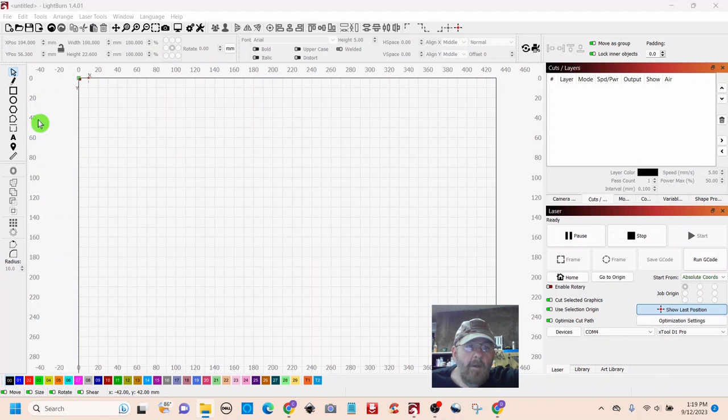Okay, so we're going to start by just grabbing a box and we're going to drag out a rectangle. Let's just make it 100 millimeters by 20.

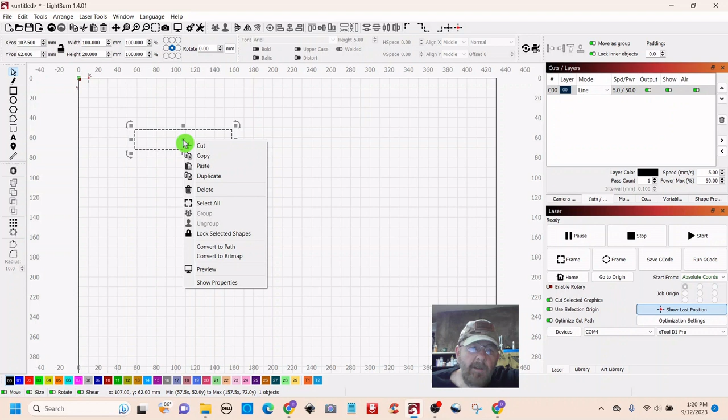Click your arrow and it'll select, and then right click and duplicate. And we're just going to make 2 without the adjustment to start with.

Okay, so go over and grab another box, drag out another little box. We're going to make this 10 by 3, and that accounts for the full width of the wood.

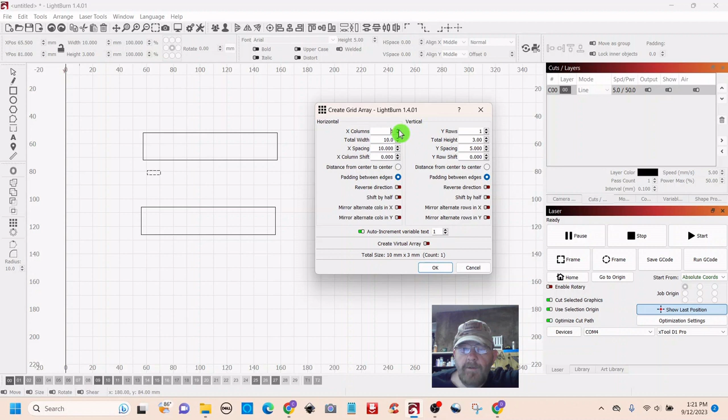Okay, click your arrow to select. Now we're going to go over to the left and click Array, and we have a total width of 10, and we want spacing of 10, so you'll have the same amount of spacing all the way across. Here we can adjust the number of tabs we want.

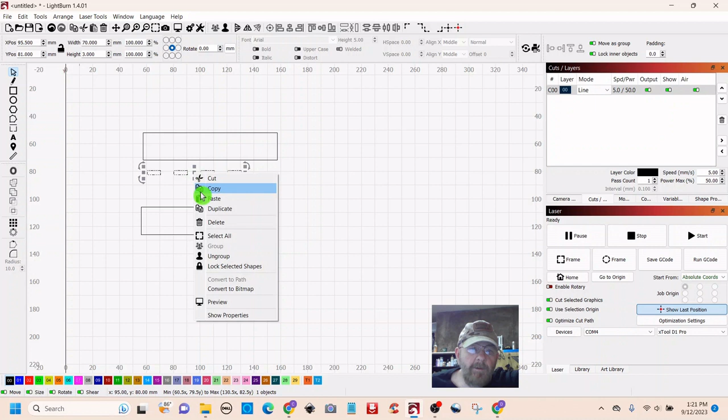So we're just going to put 4. Then we're going to drag from the right, select these, and group.

We're going to duplicate that and drag it over here for our set that we'll adjust later, and we'll get another set to bring over here for slots.

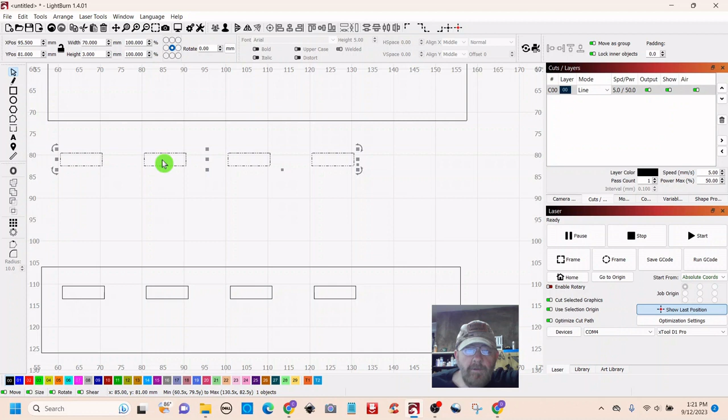Okay, so for our tabs, notice when your cursor gets close to the line of a dancing line that it changes. Grab it when it does that, and you can pull up to your other object and release, and it'll snap to it. So for alignment, whatever you want to move during the alignment, that's what you select first.

So in this case, we're going to select the tab first, shift, select the box, and then go up here to vertical alignment and click, and you see your tabs move.

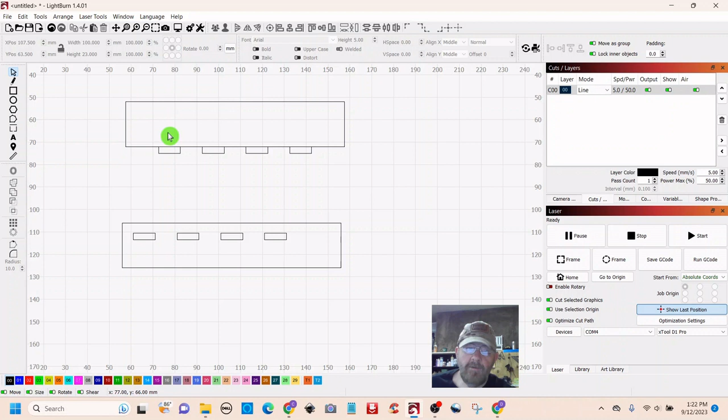We're going to use the weld function to tie these together. We want to weld the tabs to the box, so we'll select the tab first, shift, select the box, go over to weld, and click weld. Now our tabs are welded.

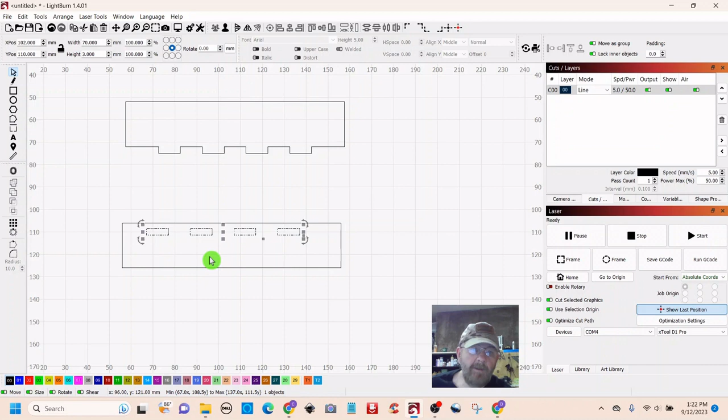So down here, we're going to make slots in the same way. Well, not quite the same, a little different. So grab your dancing line, pull it up on the inside, let it snap, come back.

Again, we want the tabs to move, so select them first, or the slots rather. Shift, select the box, go to vertical alignment, and now we're there.

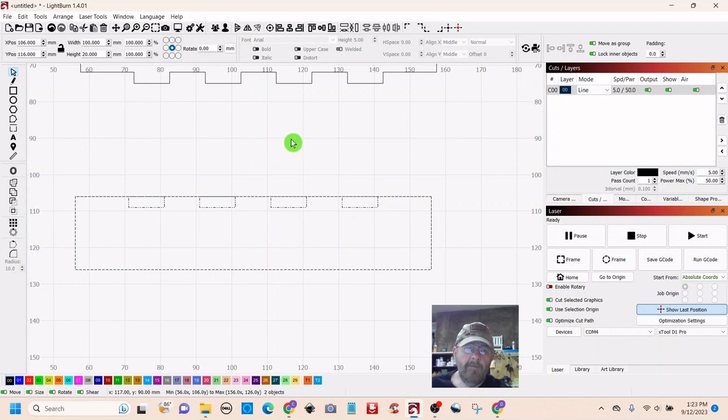So in this case, we can't use weld, we're going to use the subtract tool because we want to subtract this line that is obscuring our slot.

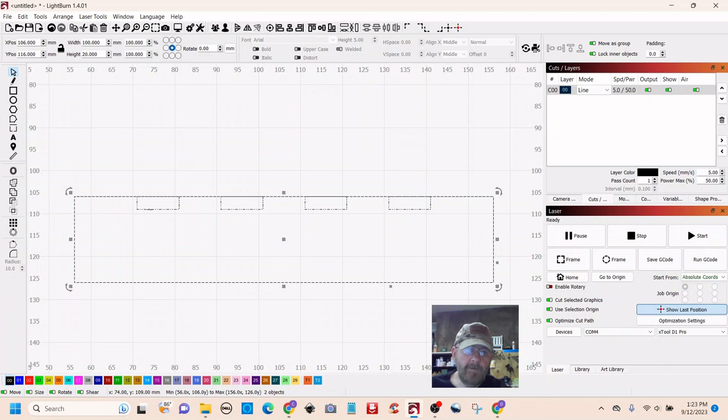So we need to select the box first. You can't select it up here because it's part of the slot. So just select the box here, shift, select the slots, go over to the left to the subtract tool, click subtract, and now we have slots.

And you can see that these fit together size-wise. I don't usually cut mine together like that because of the Kerf. You could if you adjust your settings, but I don't do it.

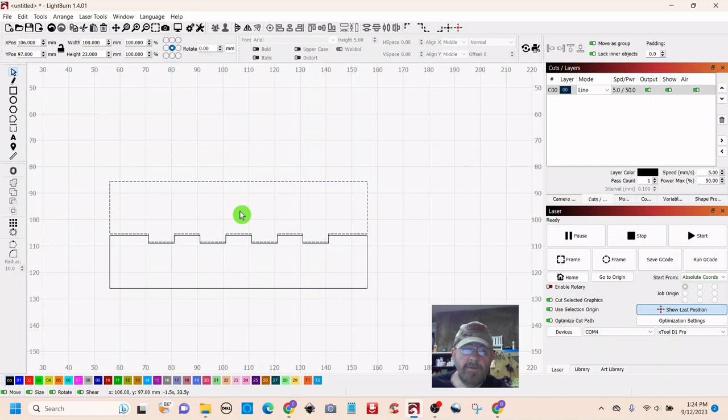So, okay, that is the first set. So we're just going to put some text on here just to keep me straight because I will get confused.

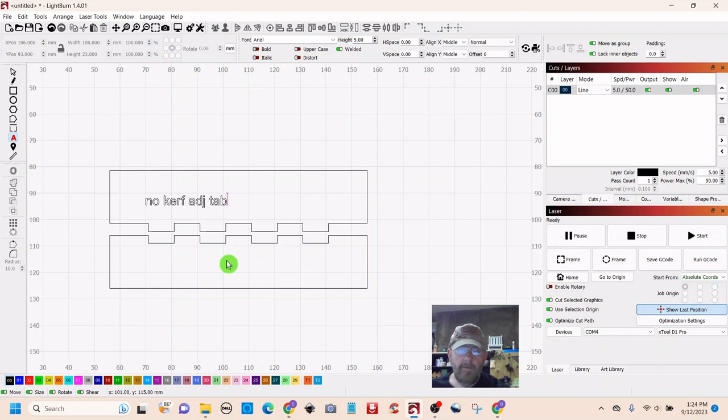No Kerf adjustment. And this is the tab. And then we'll select that, duplicate it, bring it down here, no Kerf adjustment. Slot.

And we'll make both of those a score so it'll print on it.

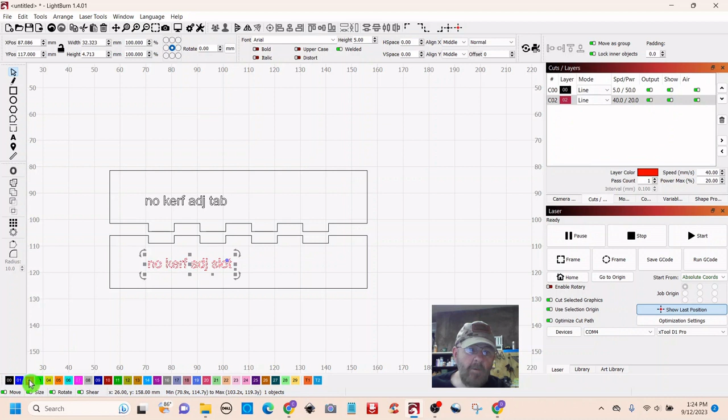And then we'll just tie that to it. You have to drag from the right if you want it to touch and select everything. If you drag from the left, you get a red line - it doesn't grab it. If you drag from the right, you get a green line, and it will.

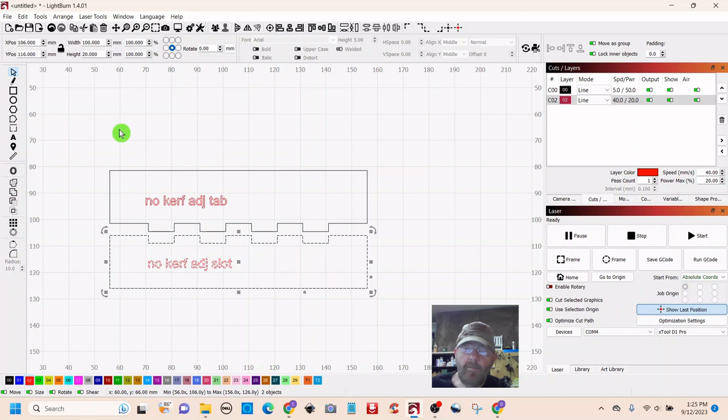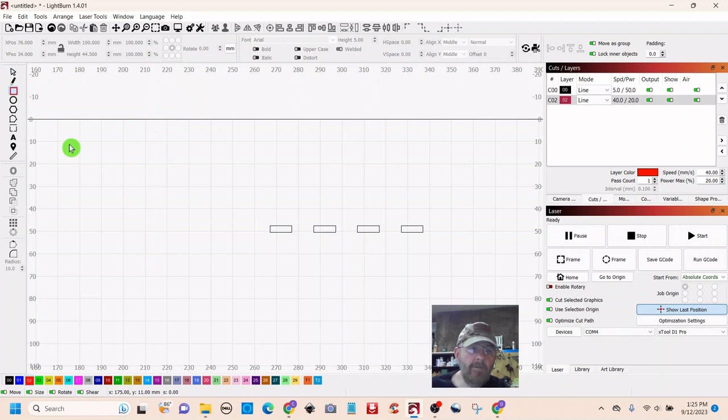Remember that, it'll help you out. Okay, so we're going to group that. We'll do it again here. Okay, those are done, so we'll stick them over here out of the way. Now we're going to start over right here. We're going to get us another box. I could have just copied one in the beginning, but that's okay - we can make boxes all day.

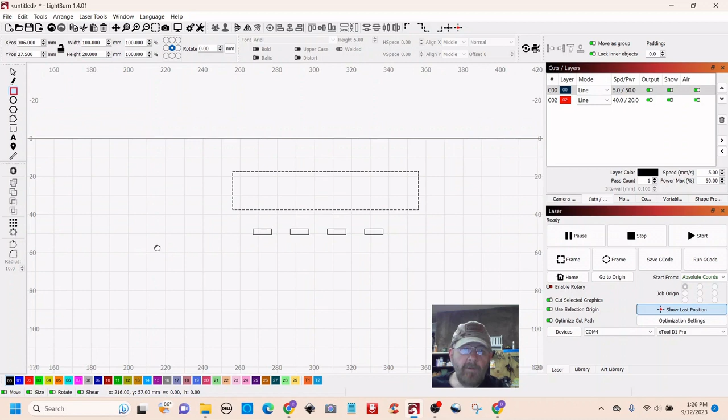I almost changed it in the wrong place. Alright, 100 by 20. Okay, so we have the same box. So we need to duplicate that box and get us one down here. Right click, duplicate, pull it down.

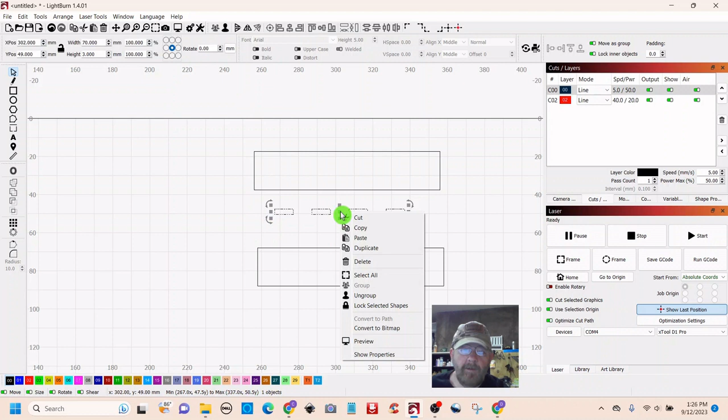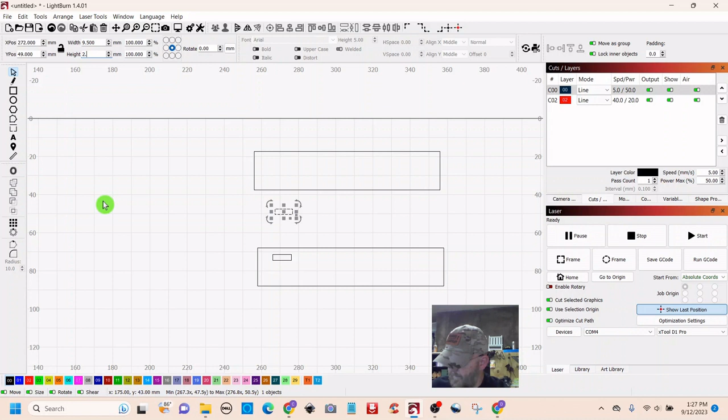I'm going to ungroup these for a second, and I'm going to delete a few of these so we can make the kerf adjustment. So I need to duplicate that because the slot is different than the tab. Okay, for the slot, we're going to make the width 9.5. We're going to make the height 2.6.

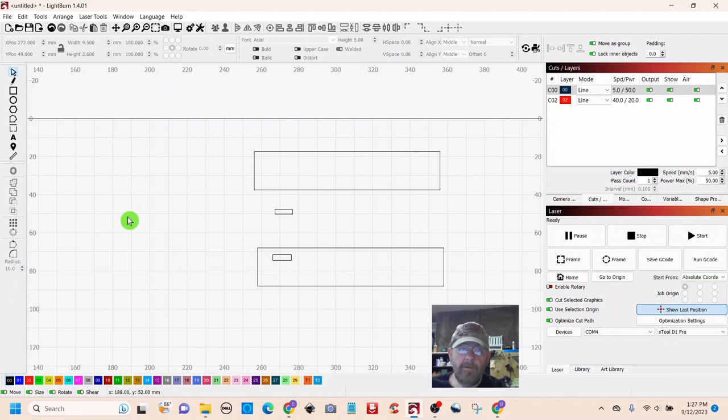So my kerf is 0.3, 0.4. In this case, I'm going 0.5 to make the slot and tab fit together better, tighter. Sometimes you'll buy SVGs online of boxes, and it'll give you a glue set and a no glue set. The no glue set has most likely been adjusted for kerf.

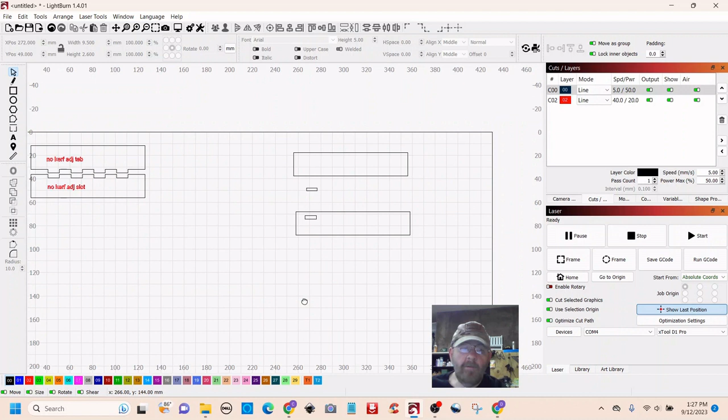So alright, let's get going with this. So this one is good. No, it's not - okay, this one, we need to switch these around. I make mistakes all the time. Don't worry about it, we'll get there.

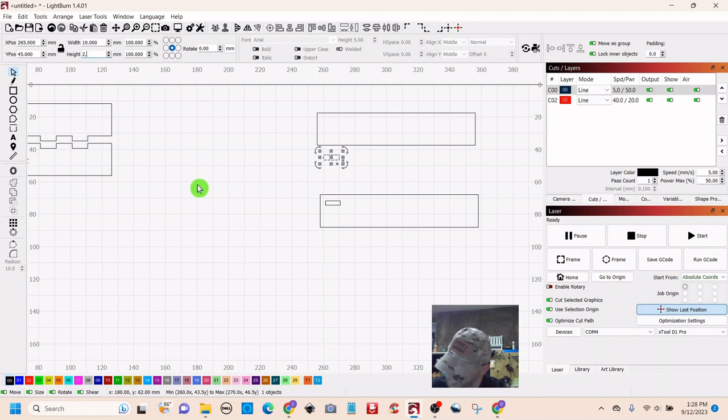Okay, so the slot will be 9.5. Okay, so for the tabs up here, we got 10 and 2.6. And this 2.6 is just to keep the plywood from overhanging when the tabs connect.

We're going to keep the 10 and go 2.6, and then we're going to do the array on this. We're going to leave the width and spacing at 10. We're going to get 4 of them.

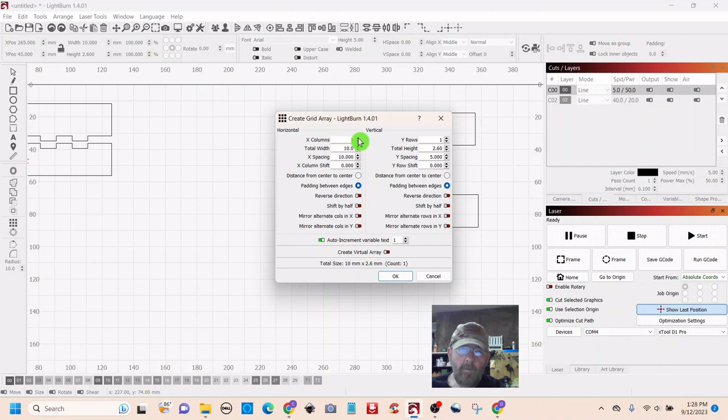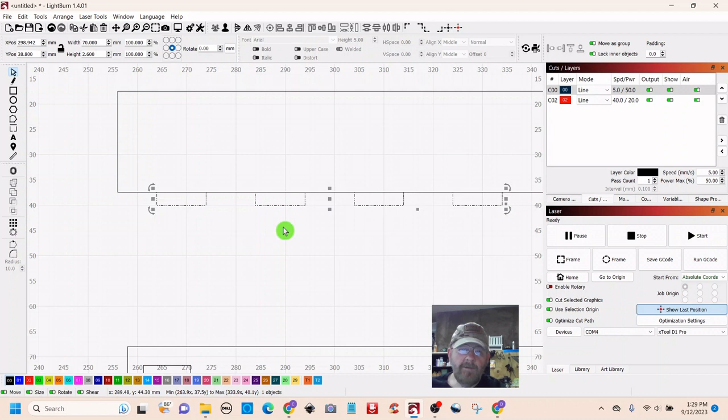Okay, now we're going to do the same thing. We're going to group. We're going to grab the dancing line and snap it to the rectangle. And we're going to shift select the box. We're going to go up and hit vertical, and we're going to get them in line.

Now we're going to select the tabs again. Shift, select the box, go over and hit weld. And they're welded. So now for the tabs.

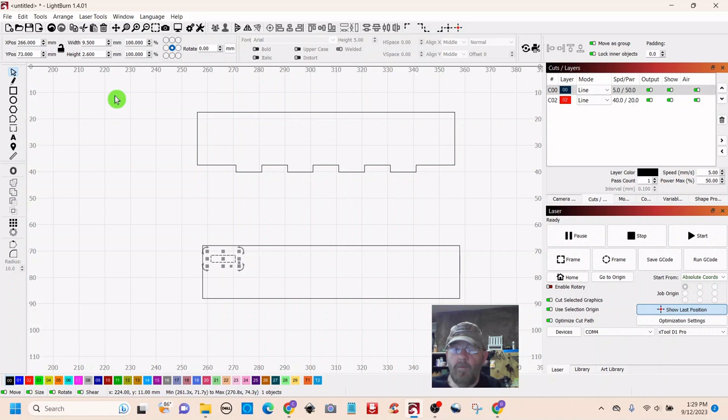So the tabs width 9.5, height 2.6. We're going to hit the array, and if you subtract from the width to compensate for the array, you have to add that back to the spacing.

10.5, and I don't know if this is the book answer or not. I just know this is what works, so that's what I'm doing. Alright, so we need 4 of these.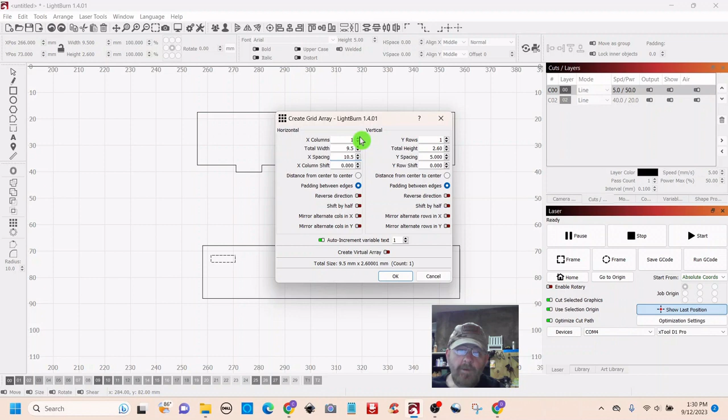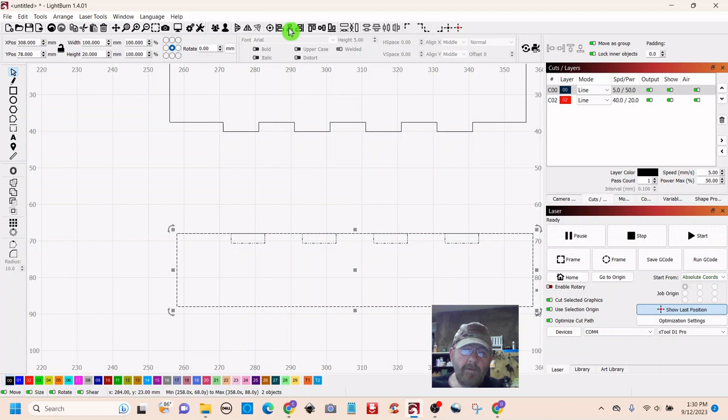Grab from the right and group. Grab the line, snap it, shift, get the rectangle, do vertical alignment, and now again we want to subtract the box away, so we have to click the box first, shift, and then click the slots, then go over to subtract and subtract.

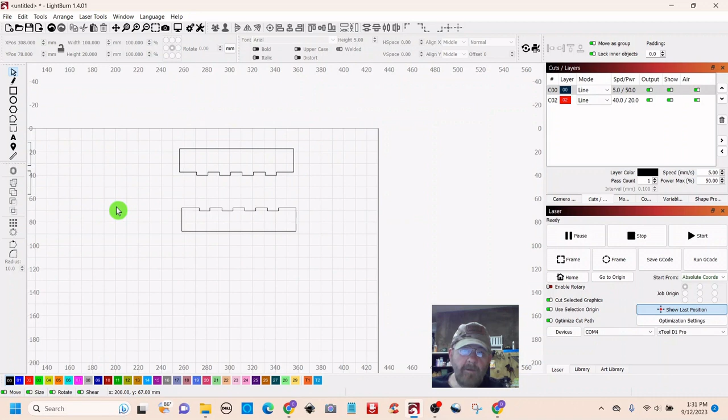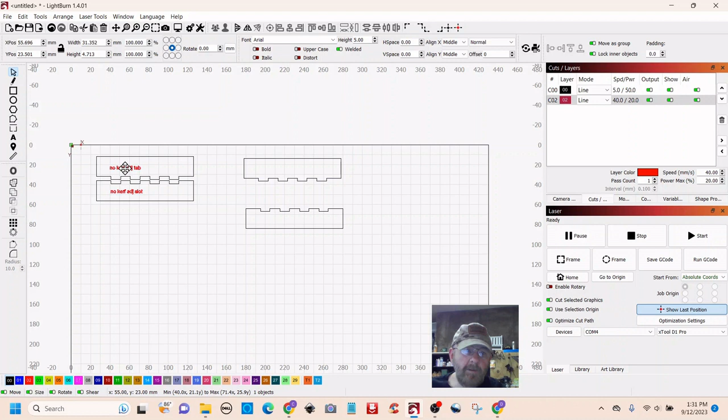And we are good. I think I'll mark these as well - that's no kerf adjustment. This is, well, I should have just copied one of those earlier, but you know, you don't always do what you should do. We'll duplicate, bring that over, group this one back. There we go. So now we're going to make this

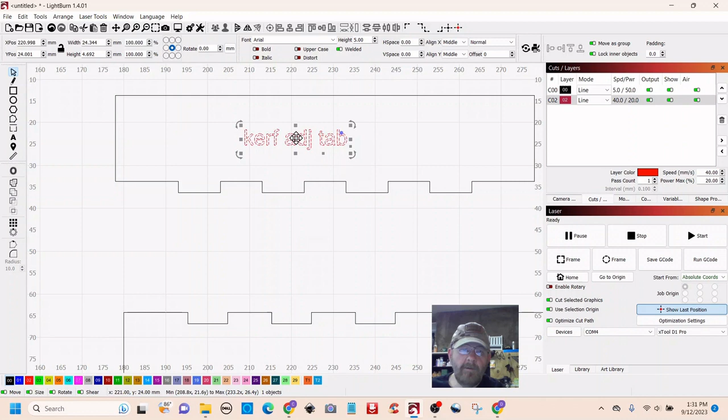kerf adjustment tab. Select, copy or duplicate's fine. And then kerf adjustment slot - that way it'll be easier for us to tell when we are comparing them after we cut.

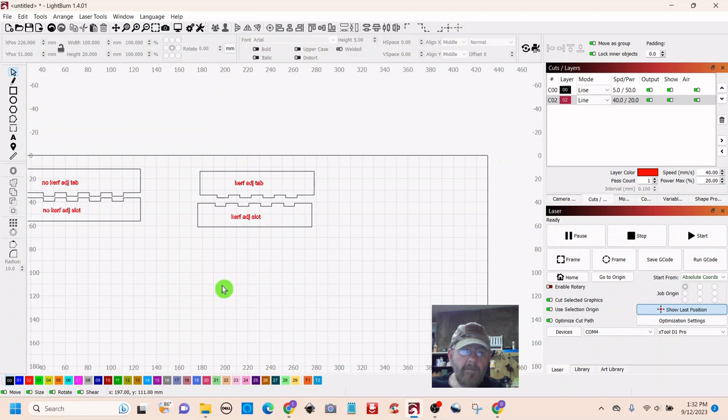Okay folks, that's all it is to it. So let me set this up and get it cut, and then we will lay them side by side and put them together, see how they hold up. Okay, I'll be right back.

Okay folks, we'll do a quick frame and then send the code over and cut these out. Alright, sending the code over.

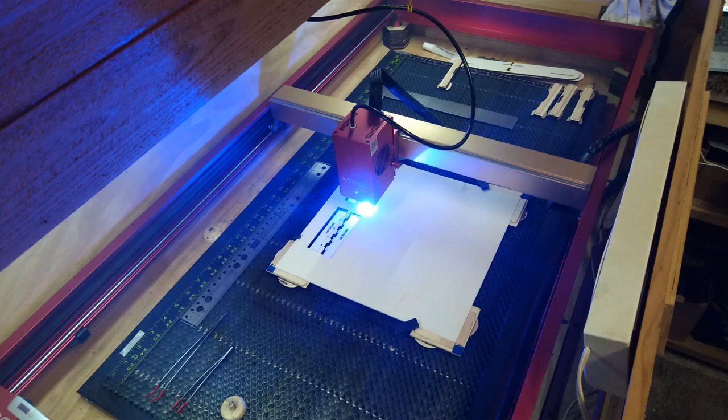Okay folks, let's check these out. So this is a set with no adjustment. They go together easy, but they fall apart just as easy. And if you made a box with these, you'd have to use a lot of glue - it'd just be real messy. You don't want to have to do that.

Learn the kerf of your laser, and you can make tight fitting joints that just snap into place. They'll be smooth along the edges. And if you have to use any glue at all, it'll be very little.